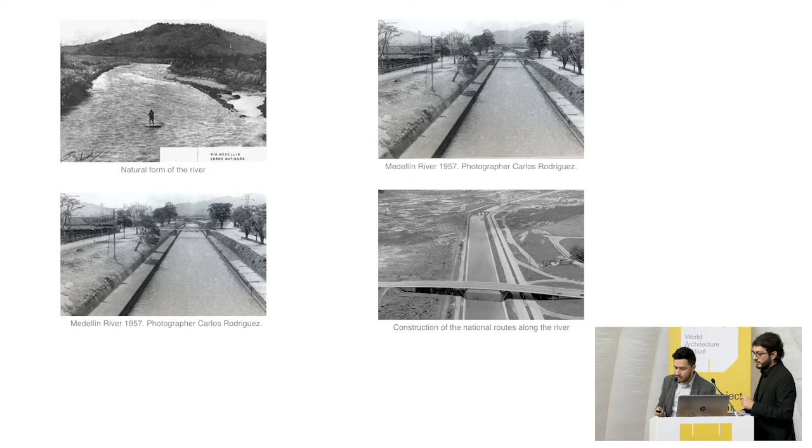The city becomes basically a non-place, because the river as a natural place becomes this powerful highway, and pedestrian crossings are non-existent right now. This is terrible for our territory, not only for humans but for the river itself. All the industry and houses in Medellin give their back to the river, and that's a terrible issue in our city.

Basically, the river right now—this is the image of Medellin, the valley crossing transversally through Los Andes, and all of this is happening in Medellin. The river is a barrier. The city is basically divided in two, and the river is a no place. It used to be usual that dead people were thrown in the river.

It's that hard. So the municipality did something really good for the development of the territory. There is something else important: as you can see in the hills, we are basically in zones of danger, because the houses on the hills are in places that can be illegal settlements. That's really complicated for the city.

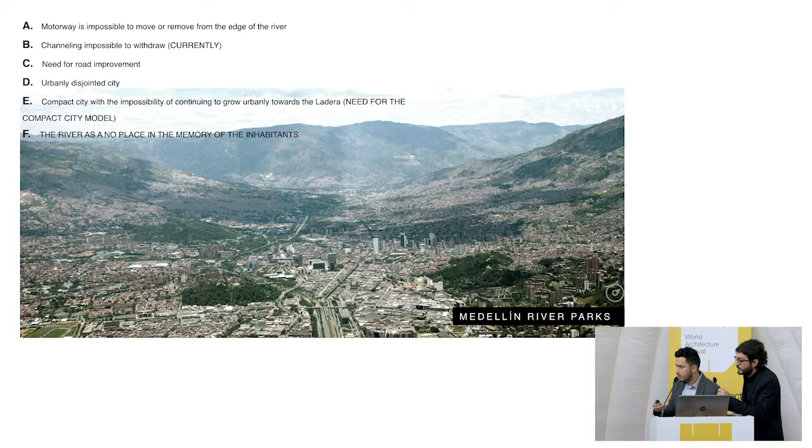So the municipality tried to change that vision and create a compact city model. In 2013, they created a competition about parks in the Medellin River, and we won the competition. These were the strategies we created.

The first one was to create a biotic corridor. Our nature is powerful in biodiversity. Our place has a climate and weather really good for those types of species—we are in the tropics. So we basically created all the connections, as you can see in this image, to connect and integrate all the fragments, all the nodes, and the ecological system with the river.

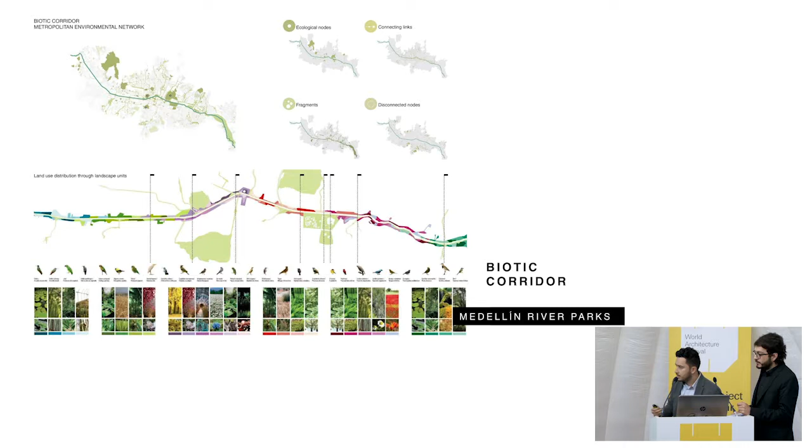The second strategy: as I told you before, the highways connect us at a national level, so they can't be removed. So basically we designed a system to put the highways underground and create parks on top of them. That's how we can possibly create public systems around the river.

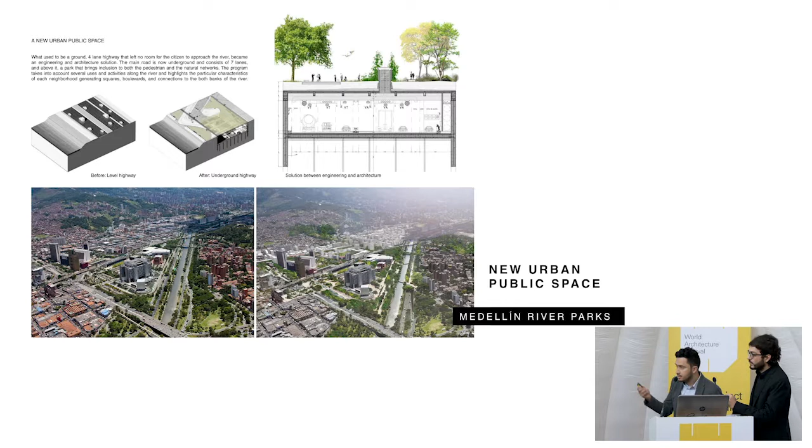This is really important to us, because the system of bridges and pedestrian crossings are non-existent right now. So the park is the possibility to make the river a social and ecological connection. Bridges are really important in the park, so we created something we call park-like bridges, as you see in the image.

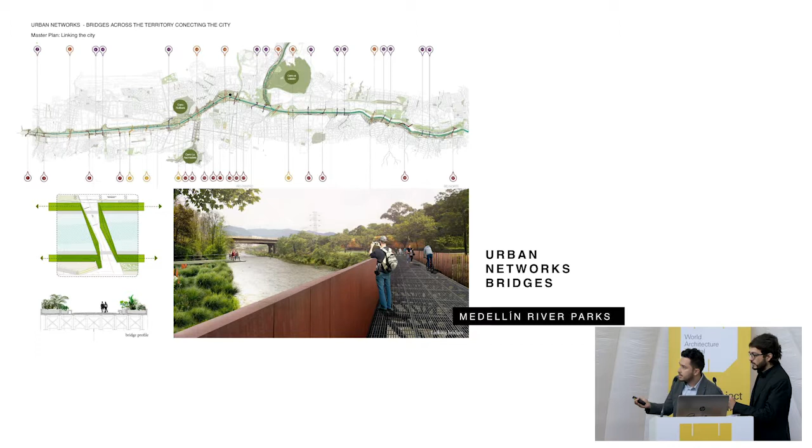The other thing we did is create something you might ask about later—why the river is canalized. You have to understand we are in Colombia, in a city that isn't that rich, and we have to be really strategic with implementation. The river right now is being cleaned by the municipality, which has invested a lot of money. Right now, the project has to become the link between the river and the people, and later, in the future, we hope the river can be renaturalized once again. So the river as collective memory is one of the main issues we want to address.

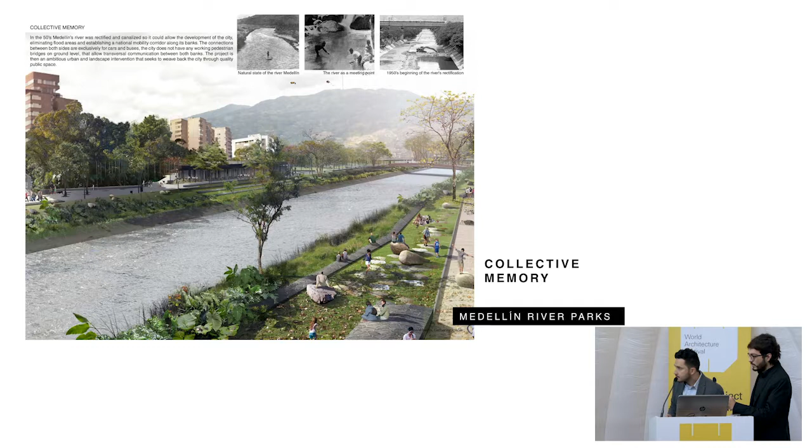I'm going to go through this part a little faster because it's quite long, but this is not only about architecture. Right now, the municipality is creating a lot of transversal actions for this project—from the private sector, from the community, which is integrated, and from design. The community is always part of the process, from the beginning of the contest until right now, which I'll show you at the end of the presentation.

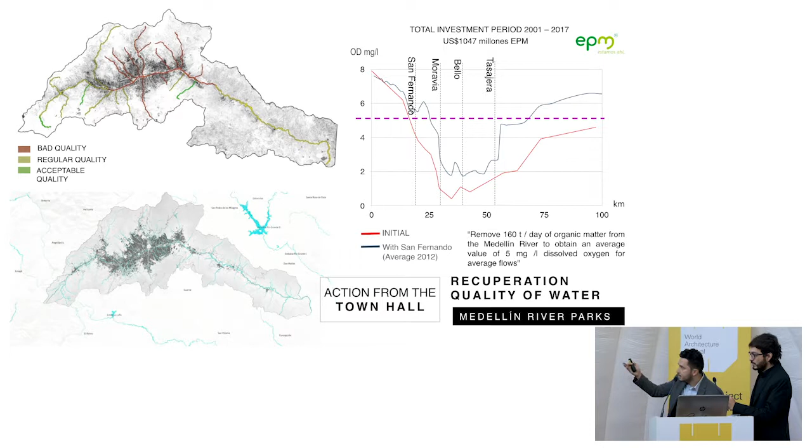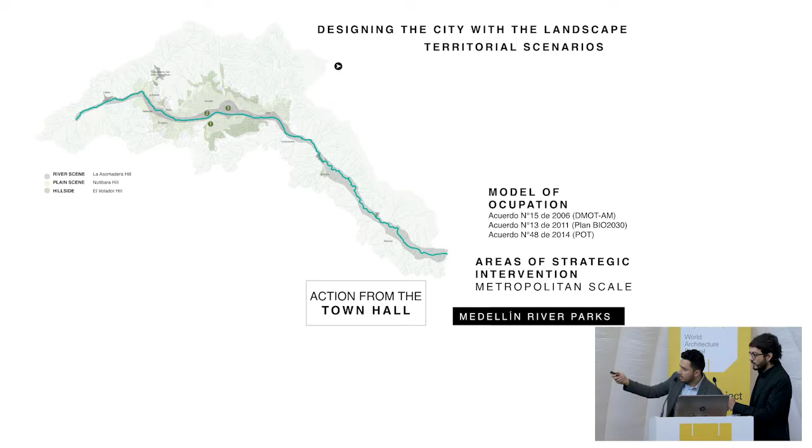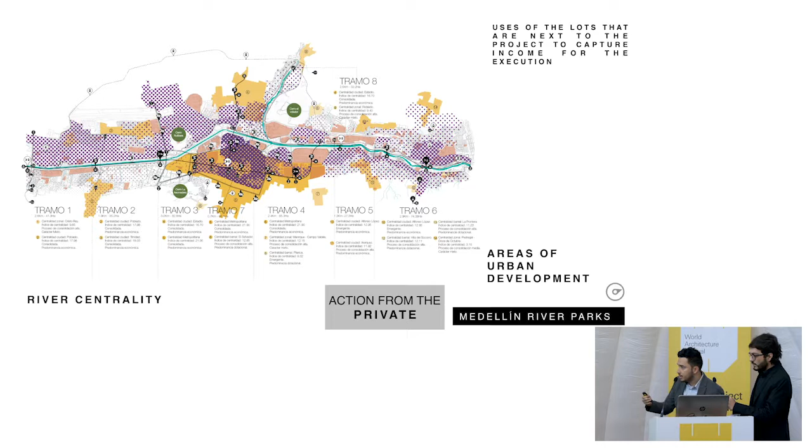This is going to be important because private investments are the ones who are going to develop the project in the future. For the development of the project, we can't bury all the highways. We have to be very strategic. As you see in the top left, there are nodes and centers of development, because those are the ones that can possibly be constructed in the future. We can't develop the whole river. We have to be very clear and specified about the areas we can design.

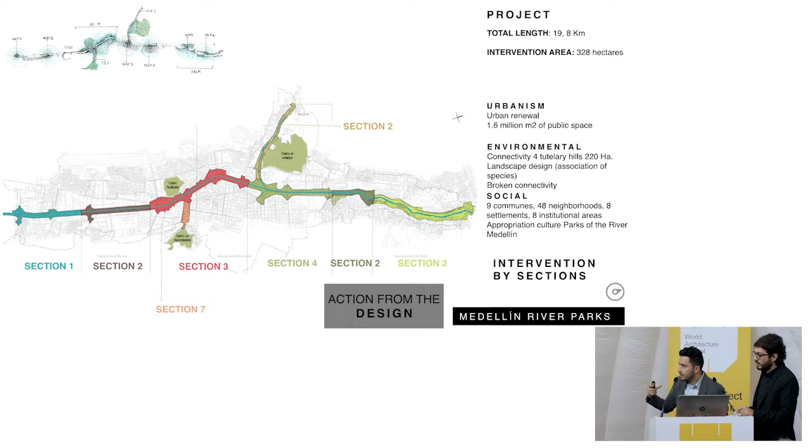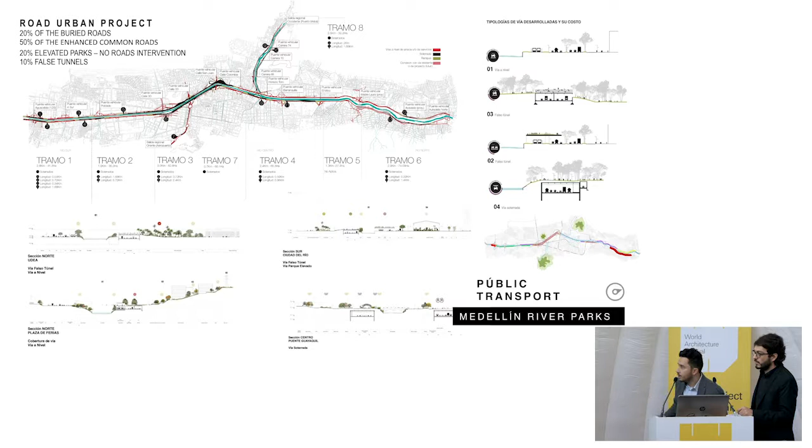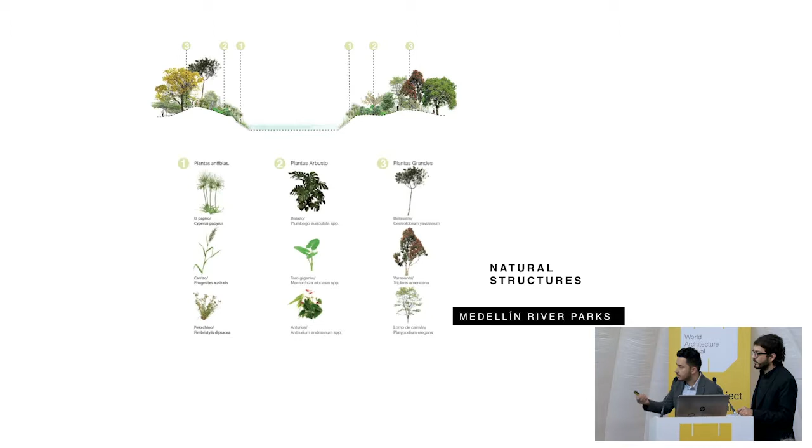And this is the exciting part. We create an urban project combining highways and nature. The black ones you see are underneath, but not all of the project is underground. We have four strategies, as you see in the top left: buried roads, enhanced common roads, elevated parks, and false tunnels. When that project is done, the ecological system goes on top and recovers all the nature that the river can and should have in Medellin.

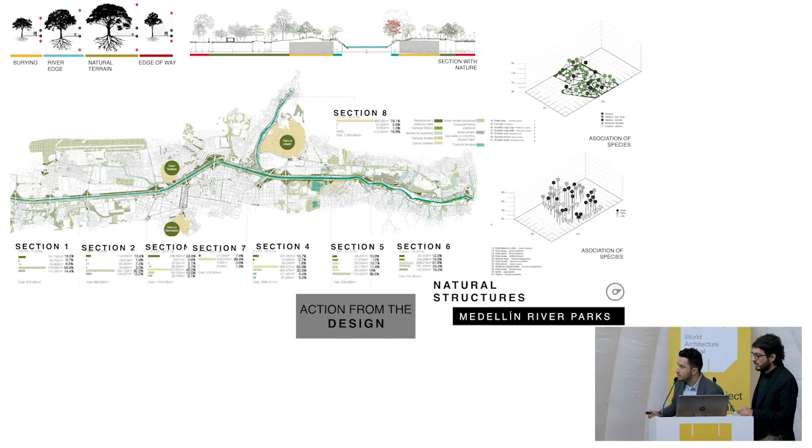This is one of the constructions of this idea of the master plan of an environmental and social integration of nature. And this is one of the most powerful things we have: a lot of biodiversity, and the project is going to highlight that.

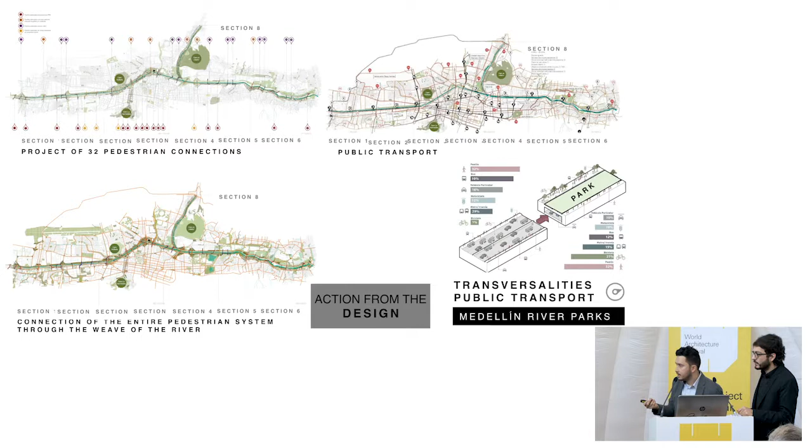As you can see, it's not only about creating a park. It's the opportunity to create links and connections between all the infrastructure we have in the city. All of these images work together with the Department of Planning in Medellin to create better possibilities for clean transport and better pedestrian crossings.

So that is how the master plan project is done. But this is the most beautiful thing that happened to us: the project is already under construction.

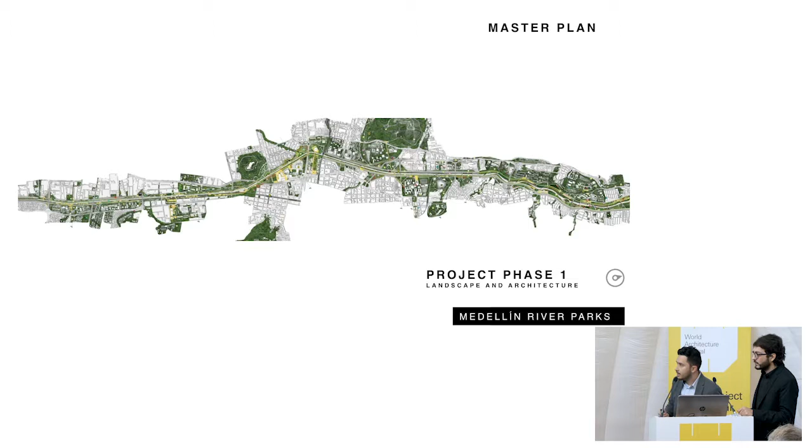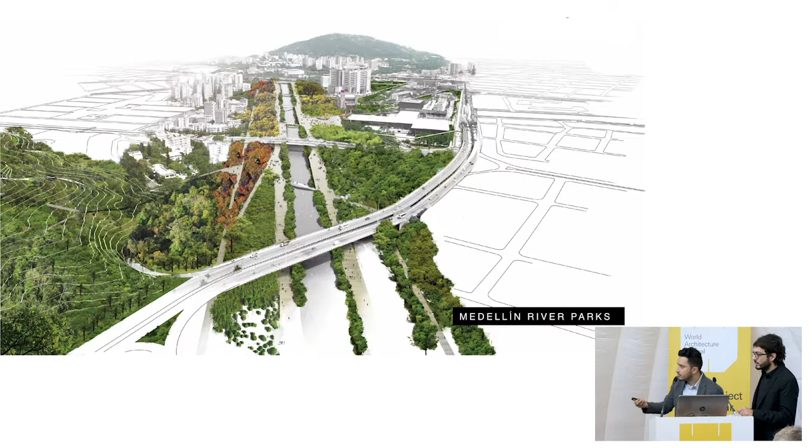So these are the images from the contest. We did something beautiful because the image you see shows the river as brown, which is its natural condition. We believe that the image and the project have to be the same. We don't like to lie in the images we make.

So we created these atmospheres of an urban botanical park to connect the community with the project in the contest. That was really important to us, that the community has something powerful to see and approach in this project—not only renders, but something they see and feel belongs to them.

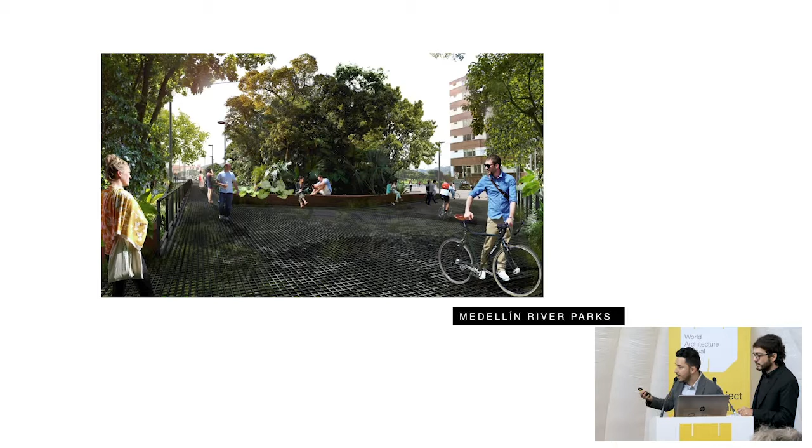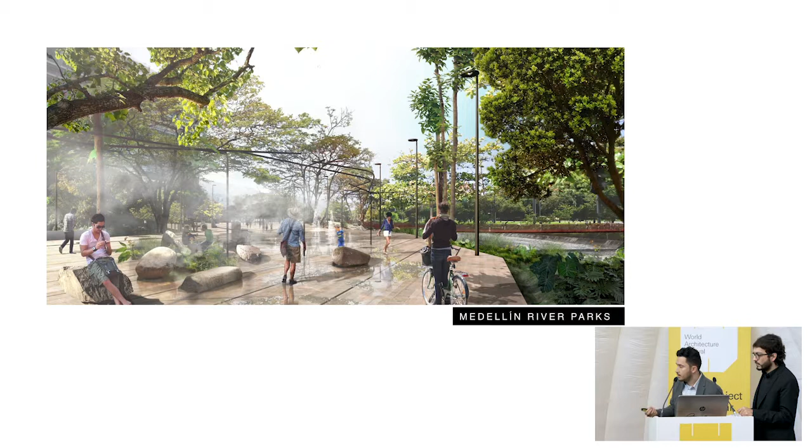So the project covers this area of intervention, which is 19 kilometers, and the area is more or less the same as Central Park, but the linear intervention is really powerful. Right now we are creating the pilot project, developed with investment from the municipality of about $19 million for the first phase.

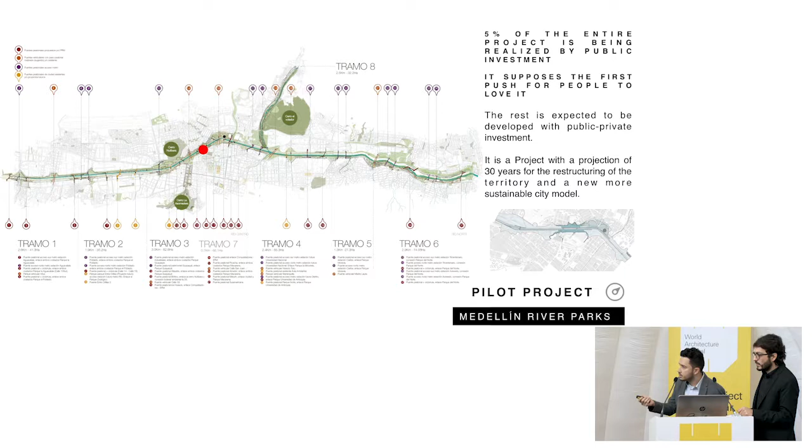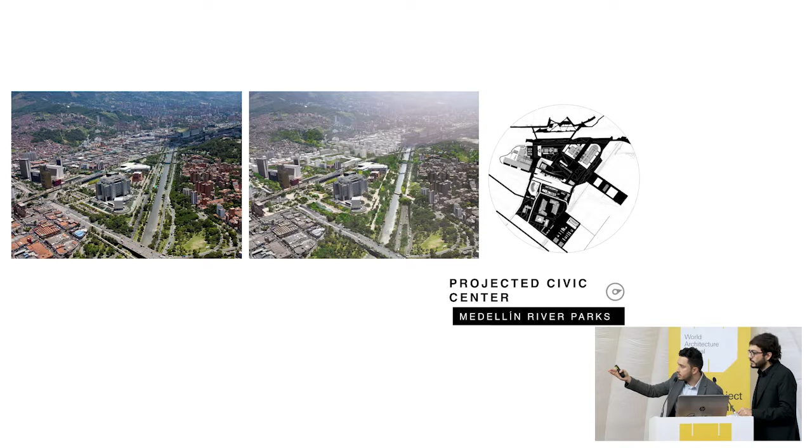As I told you, we have to look for special places to develop, the places that create the most impact with this high-cost infrastructure—because we need it, but we have to be careful with our money. This is one of the biggest points in developing the project. Here it connects a neighborhood on the right side, and a lot of universities, with the civic center of the city, creating a great central zone of Medellin.

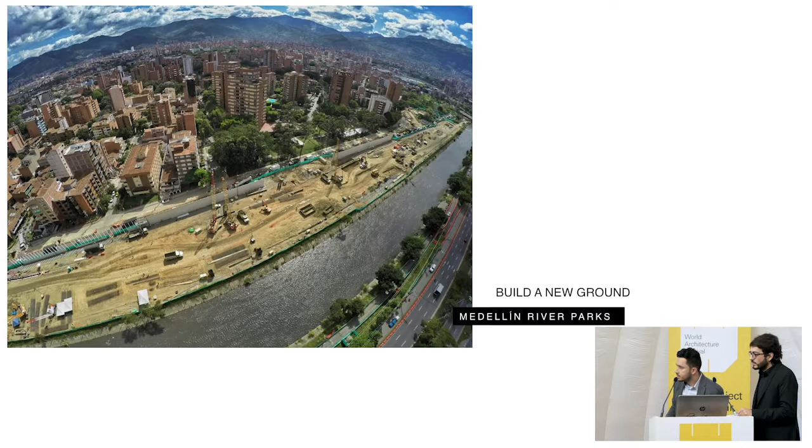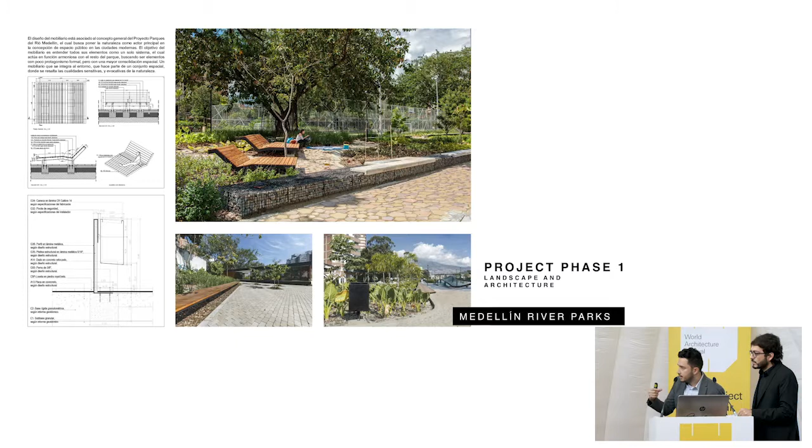Well, we're building the ground, we're creating the top. The species are coming, the nature is coming. We are developing opportunities for people to come into the project. We intend for the architecture to be a hybrid between the needs of the people and nature, because we want nature to be the protagonist.

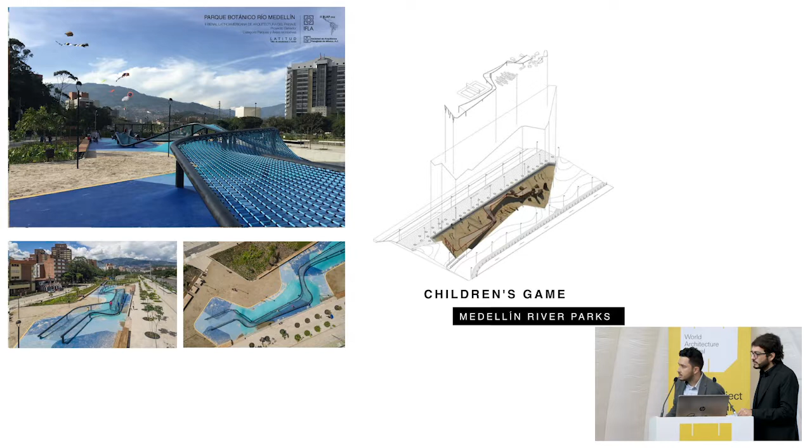These are some images of the project, but at the end there is something really important, as I told you at the beginning: the community is one of the biggest forces working for the project, because right now they are creating civic corporations to appropriate and promote the park. In the future, for our city and for us as citizens of Medellin, it's really important, because it's not only about architecture, urbanism, or landscape.

It's about how we live in this beautiful territory or geography. Thank you. Thank you.

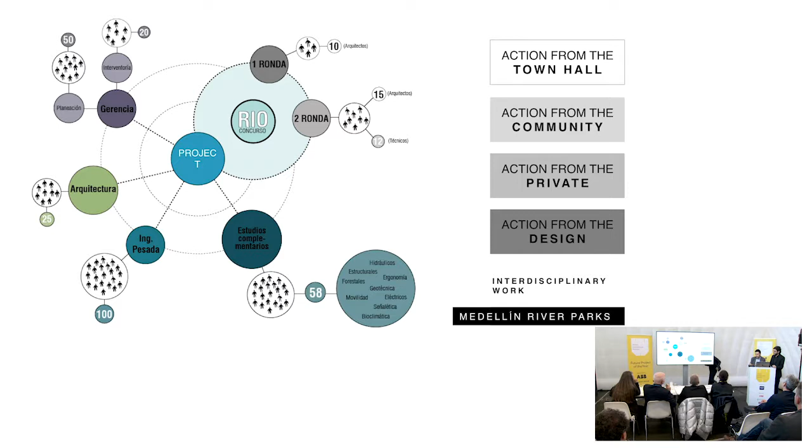This is really important, because we are just a small part of this project. The architecture is only a connector of all of these intentions. We are working on the inside with landscaping and biologists, and we have forestry engineers, and the city has those too, and we have to work with them in huge workshops every day to make the composition of that landscape. It's not our invention, I haven't invented all of that. I just connect all the needs and create the opportunities for those things to happen. But that's really important.

Thank you for that answer. I can see it's a very impressive project in its sweep, at the macrocosmic scale, and you also have an idea of what the detailed experiences would be like to inhabit the parks and places. I just wanted to ask about it being a private-public partnership venture. You said there was funding coming from the private sector. Does that impact the character of what you're trying to do? Because you'd think the public sector has an idea of what a kind of community space would be like, but the private sector, if they're putting money in, will want something back in return. How have you dealt with that, or is that indeed the case?

Okay, that has two answers, I'm sorry. As I told you very quickly, the municipality frees these areas of the river for private development. So they give the strategies to the developments, to the constructors, to create new opportunities, to be rentable. Right, so they can develop these sites.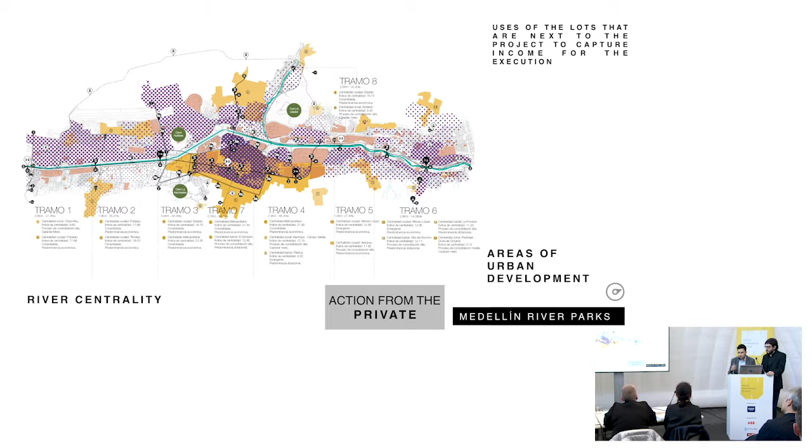But at the same time, there's a tricky issue, because it depends on what the mayor in turn wants for the development of the project. Right now, the new mayor doesn't want the project, but the last mayor put the project under construction, so it has to be done, it has to be finished. That's why we call it a pilot project, so people want it, people need it, people see it. Because if you don't see that, people don't love it, or people won't be required to support it. So, as you say, the needs depend on the private sector, but that's not bad. The municipality gives the opportunity for this development to become real. That's what's important, not the zones — the development of the project is more important than the zones they choose.

There's a sort of synergy between the two, and that's worked out quite well, apart from the new mayor, who sounds like he needs to be examined. Well, good luck with it, and thank you for sharing it with us. Thanks to you.